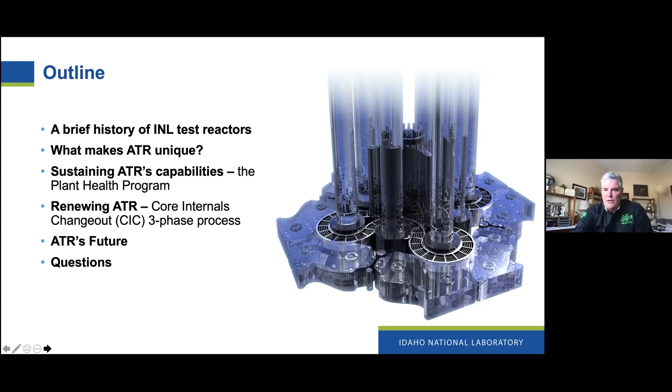So with that, the history of INL test reactors. When you go in and look, there's a footnote on here from an IAEA website, but 103 high power reactors, greater than a megawatt thermal, have operated worldwide, 6 under construction and 10 more planned.

I know that I had the opportunity to go down and look at a part of an IAEA conference when I was down in Buenos Aires just over a year ago, and look at the Argentinian reactor they're building down there. It's pretty cool when you see how folks are going about doing those types of projects.

37 of them operational in the US, and the most powerful of these operate at the DOE labs. So I've had the benefit of working at the High Flux Isotope Reactor. I've done nominally 2 tours there at HFIR, and now here at the Idaho National Laboratory in the Advanced Test Reactor.

Preceding the ATR was the Materials Test Reactor. So that started as 20 megawatt thermal, went to 40, and then that operated from 52 to 1970, which is pretty cool for that reactor. And then ETR, 175 megawatt thermal, that operated at the test reactor area, and I'll show you that here on this next slide. But that went critical in 57, operated till 81.

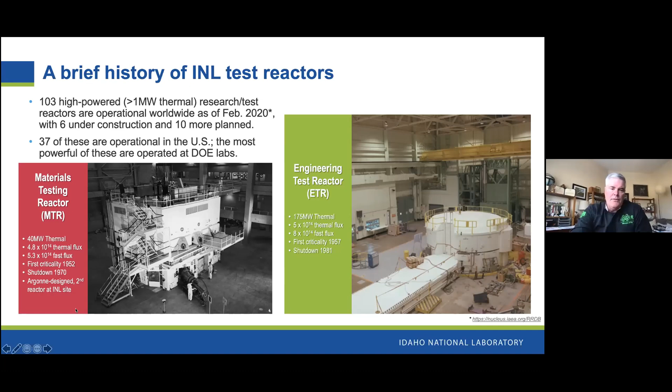There's folks that I work with today out here whose fathers actually worked at the site and took ATR critical when it started up, and actually had experience with the other 2 reactors. So we do have that in our history, with folks that have come out to the site and can talk about that. We do have people today that experienced that, so it's kind of neat.

All right, so in terms of ATR, it was created in response to fill something that the Atomic Energy Commission, the AEC, and the Navy looked at in terms of what they wanted to do, working for nuclear power plants for surface and submarine ships. At the same time, the High Flux Isotope Reactor was actually what they started with in the AEC response, and the Navy said, well, wait a minute, we need one for our work, and that is what created the Advanced Test Reactor mission need.

And so ATR actually works with the research capabilities and what they do for national security. We do work with NASA for space exploration with plutonium-238 production for the RTGs, and then university research and industrial innovation, so support the user community there, and then medical isotope work. So we do cobalt-60 and produce the medical isotopes there.

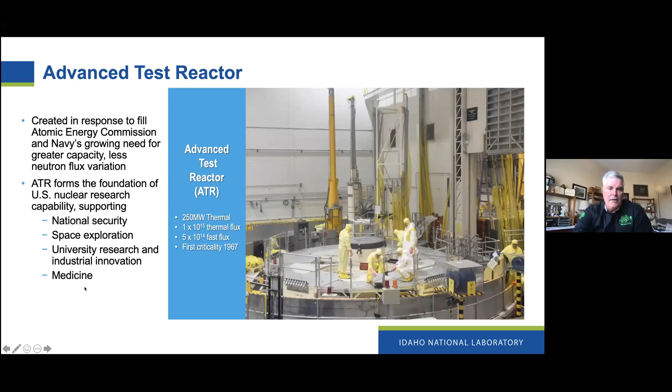So 250 megawatt thermal capability, 1 times 10 to the 15th neutrons per square centimeter thermal flux, and it went critical in 67. So I'm not going to tell you how old I was then, but I was around. That said, in comparison, the High Flux Isotope Reactor runs at 2.5 times 10 to the 15th, but it only has 1 flux trap, not 9. So we'll go through that here as we progress.

Okay, as I said before, ATR customers. So basically the big gorilla for us is the US Navy and the NNPP, or the Naval Nuclear Propulsion Program, needs for their testing of materials and fuels. So that's the big piece that we work with. Obviously, the Office of Nuclear Energy and the Department of Energy's Office of Science have a play there as well. NE is our sponsor organization, so we appreciate them with their collaboration with Naval Reactors.

NASA, as I mentioned, so they rely upon both the High Flux Isotope Reactor in Oak Ridge and the Advanced Test Reactor here at Idaho for their plutonium-238 production for their thermal generators. And then the medical and industrial needs and other special isotopes that can be produced with the irradiation capabilities we have. The university programs through the Nuclear Science User Facility, or NSUF.

If you haven't looked at that, NSUF's got their website. You can find the other details about the other nuclear capabilities that are out there, HFIR and other reactor activities and hot cells that are available to use in the NSUF program.

And then the industry, right now working with the National Reactor Innovation Center. So the Idaho National Laboratory has been designated as NRIC, and working then also with the Gateway for Accelerated Innovation in Nuclear, GAIN, and initiatives that come out of there, and being able to utilize existing facilities or expanded capability in the future that we look forward to coming to the Idaho National Laboratory.

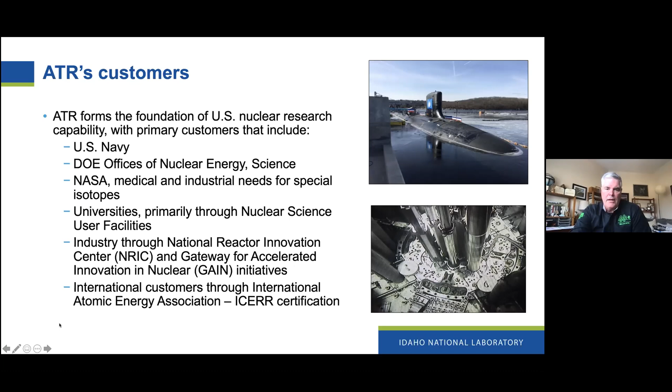Okay. All right, what makes ATR unique? As you can see, just the serpentine outline of the fuel, the 40 elements, and then the 9 void spaces that are there in terms of being able to put in-pile tubes or experiments in there. The rotating drums that we talk about that are there for the control, and so those outer shims. And then the irradiation locations, the I positions that are in the outer areas.

And then the unique shape of the beryllium that's in here in terms of its moderator. So the whole cloverleaf design, the 9 flux traps, and then the other outer area irradiation capabilities that are there are really unique in terms of that configuration. My experience at HFIR's got 1. So HFIR would have just 1 central flux trap that's there, also surrounded by beryllium. And that's 1 gigantic big donut that's a lot different than having 8 sections like this.

So very unique design, very unique in terms of its operation, and that the 4-foot high core region. So when you look at that and look across that entire stack that's there, if you looked at it in side view, you end up with this nice even flux profile that's there. And that's, again, kind of unique for that.

Independent power control. So there's actually what they call tilt. So we're actually able to control the power, let's say in the south, 20 megawatts, and be able to run 60 megawatts in the north. So you actually have a 3-to-1 power tilt across the axis of the core. Also unique. There aren't too many places you can go do that intentionally.

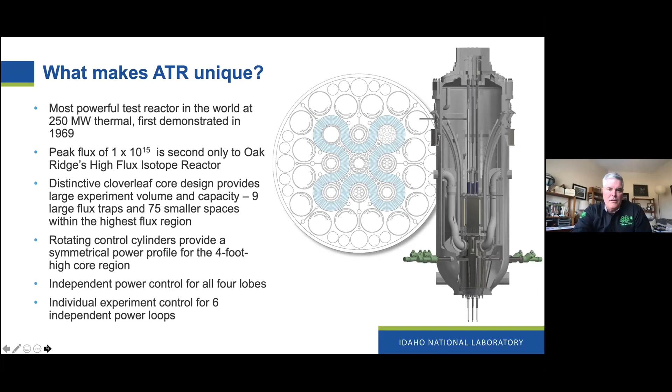And then individual experiment controls for the different experiment power loops. So we have 6 operating in-pile tubes today. Potential capability to go back up to 9, but that would take some pretty extensive work to get us back up to that, just because of margins and other activities that are going on.

Okay. All right. So how do we typically operate? In terms of just going through a cycle, it lasts about 6 to 8 weeks. So about 60 days of a normal irradiation cycle. Reactor refueling and experiment changeouts typically take about a month, 3 to 4 weeks. When we do that, what's also unique is that you've got the 40 elements that are used in the serpentine array of the fuel, and we can use an element up to 3 to 4 times, depending on how we want to tailor the fuel and flux density.

And so when you're doing a run, it's kind of different to think that you're not one and done with a fuel element, and that we actually store those out in the canal and then bring them back into use. And for each core, it is a different core safety analysis. So one could argue that every time we bring the reactor up, we've got a new core design. And it's really unique in terms of being able to do that and reuse the fuel.

For the Naval Nuclear Propulsion Program, every third cycle we run what is called a Powered Axial Locator Mechanism run, or a PALM cycle. This allows the 2 experiments that are left in the reactor. We basically take all the other experiments out and move them into storage, and then run real high cycle time. So over the course of 7 to 10 days, you could literally run an experiment in and out of the profile through the core in the high flux region 1,000 times in that time period. So again, unique, but those are for Naval Nuclear Propulsion Program requirements. So PALM cycles, again, rather unique capability there.

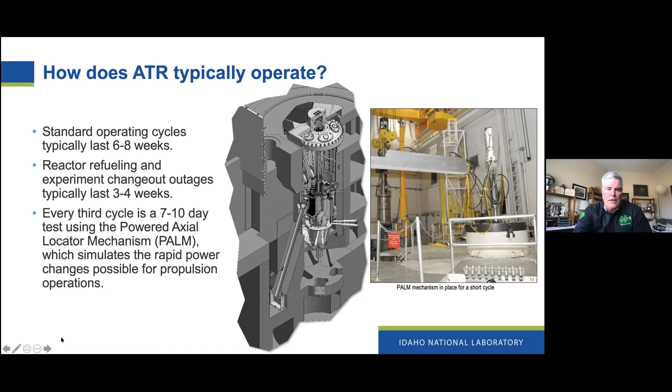And then we'll run multiple cycles, obviously, throughout a fiscal or calendar year, and we track that in our ISOP, which is the operating plan, and project out about a 3-year window of what we're going to do for experiments and how we run. Okay.

All right, so in terms of sustaining the capabilities, if you go back, I came to the laboratory in 2018. Preceding that, back in the 2012 to 2014 timeframe, the plant health program was initiated, and it was identifying that irradiation days, the ability to run the facility and give the highest number of irradiation days in a year, was starting to degrade.

So if the desire was to run 180 days, we'd be able to run about 140 because things weren't operating at the reliability and predictability that we were hoping for. So what happened at that time is they started the plant health program and the investments. And what we've developed now, as you see in the background, is this investment strategy document we update every year, and it basically goes through the prioritized projects.

So are we going to replace a motor? Are we going to replace a well? Or are we going to do something with a valve assembly or a different pump? What we do in terms of those projects and their prioritization to reduce the risk to not meeting our irradiation days. And so the execution of that is a DOE Office of Nuclear Energy, NE, and NR investment in the overall program. NE provides us funds that we go and put into that.

We've, since 2016, been able to do over 100 million, and right now it's about $130 million of total scope. And we'll go through a couple of highlights that we've worked on, including the CIC preps and things that we're going to talk about as well. So rather significant investment. It's kind of fun to watch folks that have been out here for many years reflect that it's nice to see this investment because it ensures that we are going to have the capability for much longer into the future, and that we're taking care of some things that folks have been concerned about in terms of just maintaining the facility and being able to run at the highest availability and predictability we can.

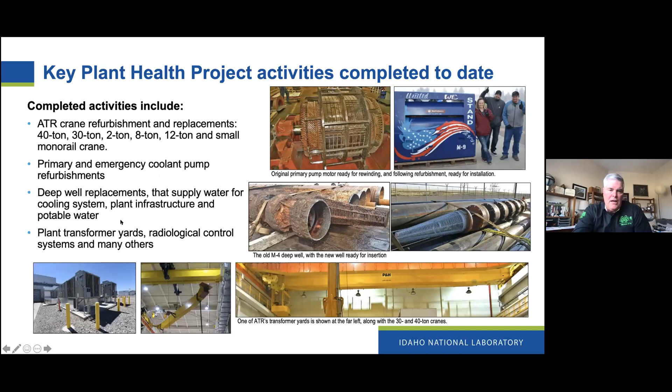All right, that transitions then from what I'd call sort of routine maintenance, to once maybe in a career, but for some, there's a second or third opportunity to go through a core internal changeout. I've asked and not had anybody identify they were here 4 CICs ago, but a core internal changeout.

So on average, when you see this timeline, ATR went critical back in '67, and they did the first CIC in '72, another one in '77, made it to '86, and then '94 and 2004. And here we are in 2021, next month, a month from today, starting up this next core internal changeout. I'll talk about here a little bit of why they're needed. But we've gone 17 years since the last one.

So we're knocking some dust off and have done a lot of preparedness in terms of operations and tooling and procedure reviews and getting prepared for this. But we had done 5 CICs up till now. And it takes place in 3 phases, and I'll go through the discrete phases here in a minute. But why are these needed?

Once the reactor's scrammed, and I'll go through the details, we defuel it, take the experiments out, and we'll actually remove the top head. And then the top head of the reactor will come off, and then we systematically go in and take some of the infrastructure of the core internals out of there and replace them with new.

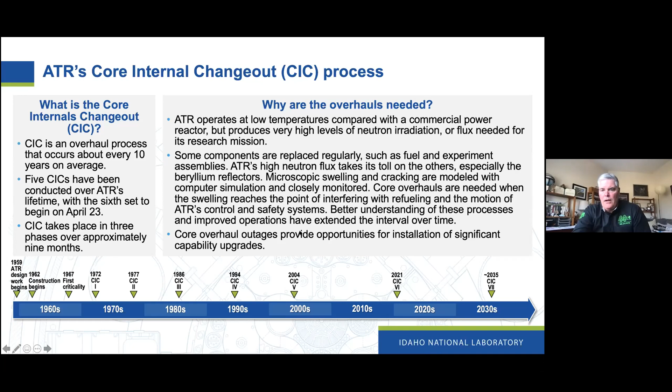And so in 2021, like I said, next month, we'll initiate a 9-month outage that will go in and replace things like the beryllium, like some of the control surfaces in there. And then it also looks at potential for upgrades. We'll work through some of the other plant health projects during this time as well.

Okay, so 3 phases, basically breaks down to removing the top head of the reactor and getting ready for working through the internals. So this is removal, taking out the gearbox and the outer shim control cylinders, the beryllium blocks, and getting everything out so you get what they call a clean vessel. And then look at the new components going in, and then shift once all of that's restacked and aligned.

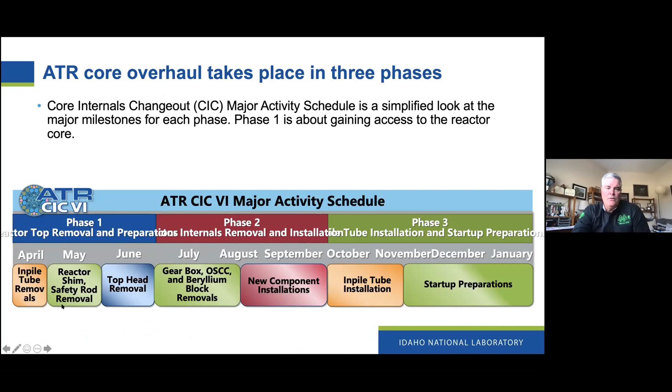Then we go back and start to work on putting the top head back on and doing the in-pile tubes, and then go to nuclear testing and startup. So that's real high level, and I'll go into the details here on the next one.

Okay, so in terms of phase one, that's where we actually remove the top head. So you can see over here, and we've got some pictures in there. Rather significant lift, and that was a good reason why the 40-ton crane was back in there, because it's about 36 tons, I think, if I'm recalling correctly.

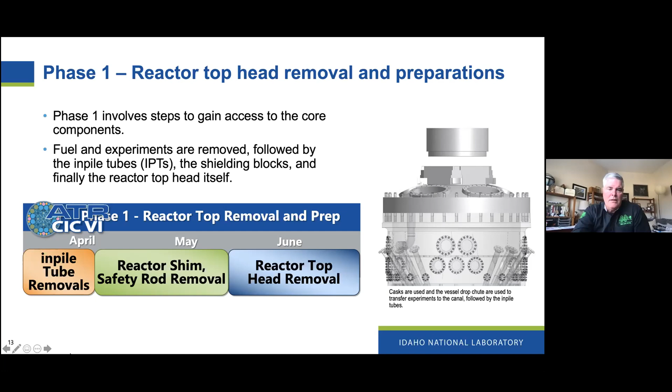And then we remove all the fuel and experiments and make sure that the in-pile tubes come out, the shield blocks, and get everything set up. And so when the top head comes off, it goes on a stand and sits on the reactor floor. And so you can see them going through, and this is a cask assembly on top, removing experiments and getting things set up. So this whole area will start to come apart. Shield blocks will come off.

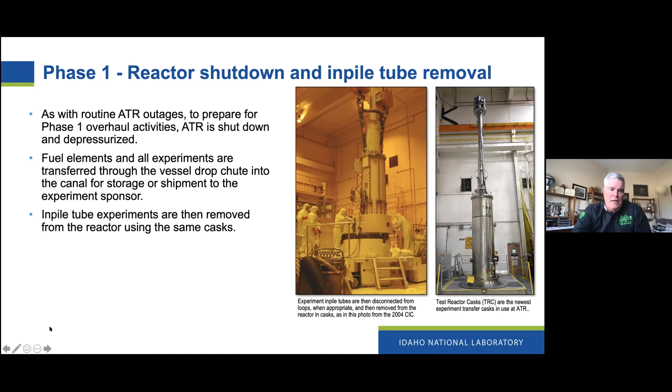But we are shut down, depressurized, defueled, and then start moving things into the canal via this drop chute. So that's actually the tube. I can go back up, but it's how we transfer things without going in air from the reactor itself into the canal area. And then again, a lot of cask evolutions in terms of moving experiments around and getting that done.

So then you're looking down at the top head itself, and these are shield blocks. So you've got 23 of these that move around and shield, and you can see the metallic surface under here. So this is the reactor top head itself and some of the ports and the port covers on them. And so as we move these blocks out, they'll be staged, and we're actually taking them outside of the facility, about half of them. So figure, what's half of an odd number, but about 12 of those will be taken over to another facility, actually sandblasted and repainted, and they'll be reinstalled when we go back into phase 3.

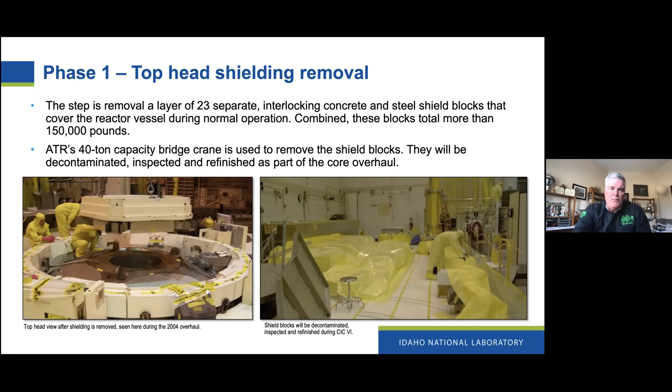But when you look at this, the shield blocks come off, and then we access the vessel head itself. And then you can see this, that's a rather significant lift, and you've got folks coming in, they're actually going to skirt the bottom of the vessel head itself. So 62,000 pound stainless lid. We lift that, put it on a stand, and we're actually going to do some work.

So if you look down in this area, this is actually fuel grid support that's going to come off, but the underside of that's got what we call the top head closure plate. And we're actually going to replace that with a new top head closure plate that will have 8 additional holes in it that'll allow for other experiment capabilities to be used in the future. And that's tied to some other things with the Halden reactor shutting down and being able to take advantage of the ATR flux for doing future work in there.

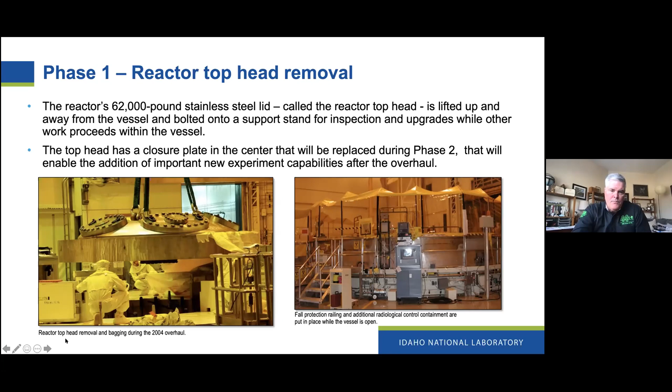Okay. All right, then we move into phase 2. So phase 2 goes in, like we said, removal of components within the reactor vessel itself. You can see this picture of operators looking over a port area down into the vessel and being able to get access to in-pile tubes and the cross arms that are there and get into taking other pieces of the reactor components out. So this platform's installed, and then they begin to further disassemble the core internals.

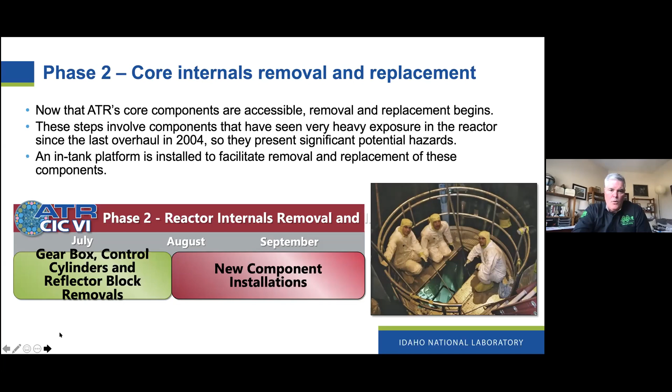And moving through, we've got, as was highlighted here in purple, the control cylinders themselves. So being able to remove that, and then the gearboxes that turn these, they're up on top of that assembly. Those gearboxes, this is a picture of one, actually are the drives that turn those cylinders. They will go into these things affectionately called banana cans. And so these are shaped, they've got a little arch or bend to them. And those will actually be transferred out of the reactor vessel and into the canal through the drop chute.

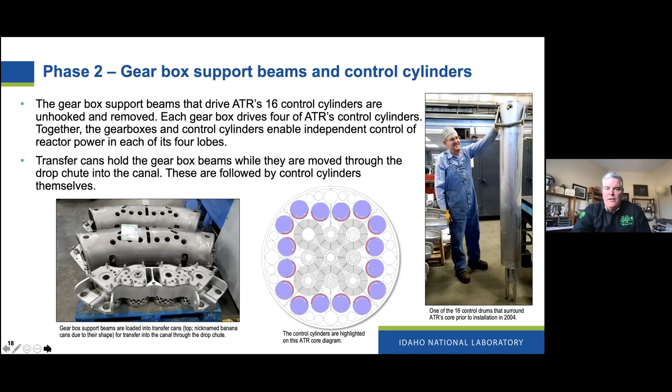So that's going to be a tricky one because you're playing between 2 crane assemblies, one in the reactor high bay area and the other in the canal, and actually have to transfer that and move it from one area around the other without getting it stuck. So we've actually done some preliminary work on that and made sure that folks are proficient in getting that through. We took an empty banana can and played with it there, because having not done that for 17 years, it takes a little while.

Okay, and then we do in-air transfers. So some of the equipment we can't fit through the drop chute, so we actually have to do it as in-air transfers. These are highly irradiated core components. And so when we actually do this, we evacuate the facility. There's a limited number of staff that are there to operate the crane. You can see some of these shielded areas that are there and the windows that we're able to shield. And then there's a contingent of folks that are outside the facility with a backup mounted winch to be able to move things if, heaven forbid, we were to lose power during that evolution or ran into a problem.

But they do not fit through the top or the drop chute, and so we actually lift them out and then transfer them in air to the canal via the crane. And then the crane operators that are there, we actually evacuate the site and do that. And we're able to do that the way it's scheduled right now, basically a Friday through a Sunday, which means there's limited staff around anyway, because our normal work week's a Monday through Thursday, a 4-10 schedule.

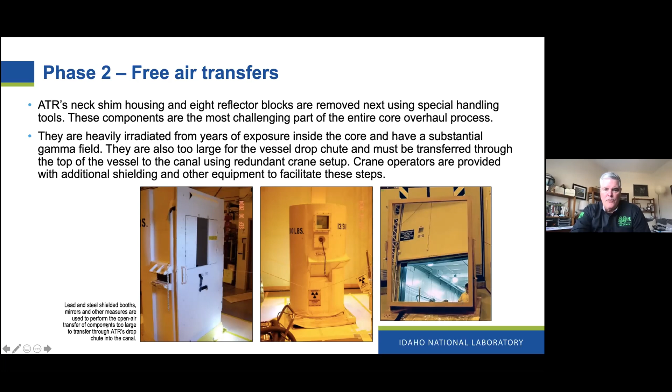So you see here the shielded booths, and being able to work from those spaces, they actually can observe and keep the operators safe from the higher doses. Okay. So then the next thing we do is the reflector blocks and neck shim housing. So the neck shim is actually this tall aluminum component that's there in the central portion, and then the beryllium blocks. And so you can see the unique shape of these.

The other thing we note in here is these are actually side cuts in the beryllium, and these are to allow for crack propagation to be limited. So you run into a controlled cut here, that the crack, if it were to start down in this section, wouldn't move beyond another area. And this is the nose piece that would be in near the in-pile tube itself. And so those are important to make sure that we end up with no cracks, or don't want a piece of that breaking off.

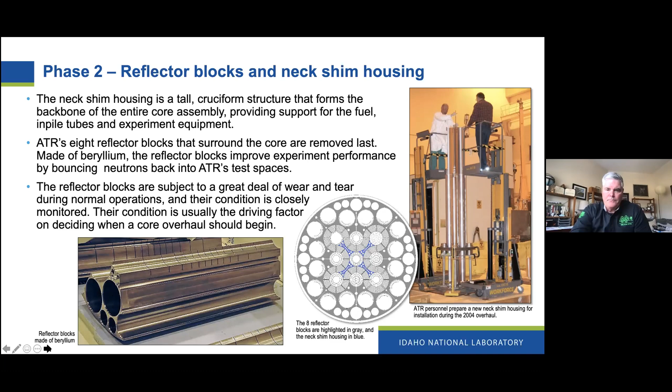Okay, so this again is the biggest piece of making sure we start the CIC early, is that we don't want a control cylinder binding in these holes, or we don't want a piece of beryllium swelling or cracking such that we're unable to operate. Okay. All right, then we get into new component installation. So now everything's out of the reactor, we start building it back up. We're gonna do some vessel inspections. So this is just visual going in.

We've already done some ultrasonic and played with some new scanners and had a really good look at weld areas and questions about the integrity of the vessel. And it's pristine. It's the beauty of a stainless steel construction. But going in and doing these visual inspections, we start building things back in. So the new neck shim housing, reflector, beryllium blocks go in, control cylinders, and start working things backwards from what we took apart.

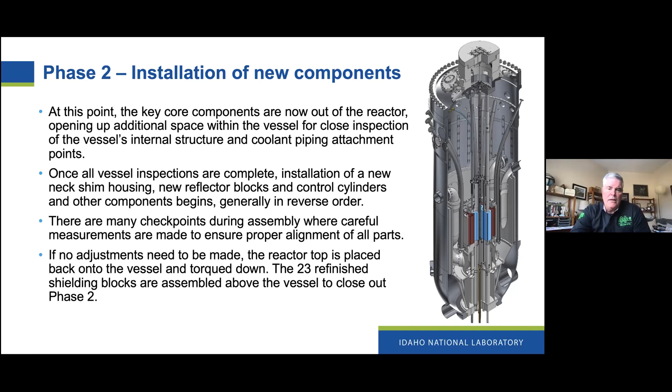All this is done through a lot of procedures and control points. And then making sure everything aligns. So this is making sure things don't bind and get everything back to torque specs and to where the core itself is reconstructed. And then the shield blocks, the vessel head would be ready and reinstalled, and get back to the end of that phase. And then we go back in phase 3 and get back inside the tank itself and start reinstalling the in-pile tubes. So then those and the experiments get loaded back in.

We've got some welding to do for some of the cross arm pieces that tie into the side of the reactor vessel itself. And then once those installations are done, and I'm minimizing the amount of work, that's a huge effort. We have folks back in the tank again. You'll see some pictures here. We're using some new technology for us, but it's been out there in commercial forever, and doing the welds this time with new tooling. But everything's sealed up, tested, pressure tested, and then we're able to start up and get back into preps for getting the reactor back and doing nuclear testing.

So when you look at this, we just actually got a new tube welder, right? So this orbital welder assembly, this is one of our welders actually looking and controlling the weld head. It's kind of cool. And I was out there when they were doing it, and the rep for these guys told us that this controller itself is set up off a Formula 1 race car steering wheel. That's what they used as a prototype to kind of lay that out. So I'm thinking, okay, that's pretty cool.

But it'll allow us, instead of doing hand welds, to get this set up, and the orbital welder can knock these welds out without somebody standing right up on it, which allows us to be more ALARA, right? And less radiation exposure. Okay, and then you can see here on this picture, folks being able to lower the in-pile tube assemblies back in and get the experiments set up. And then when you're down in the bottom, the bowels of the reactor and the sub-pile room, you can see where things protrude down the bottom.

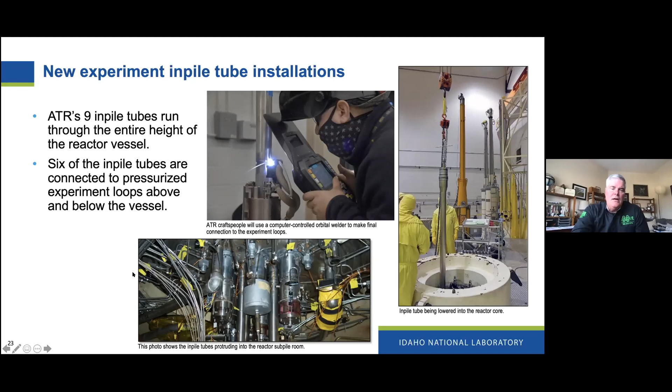And this is something we have to go in and clean up in there as well. So we'll have the bottom of the in-pile tubes in the sub-pile room that we work through, making sure all these seals are tight and that we don't have any leaks. Okay. All right, so with that, I'm getting down to the end.

We'll have completed that. It'll be a 9-month evolution going basically from April all the way through December. We're trying to finish up before Christmas holiday. And then we go into a phase of nuclear testing and making sure we understand the rebuild on the core profile, and it's exactly as we anticipated.

We have customer demand for the irradiation capability. It's been identified well through 2040. If you read NNSA's strategic plan, they talk about thermal irradiation capability need at ATR all the way out through the year 2080. And I don't think I'll be operating or working out there that long, but I know we've got staff that have started that could potentially be out there for another 60 years. It'd be kind of fun.

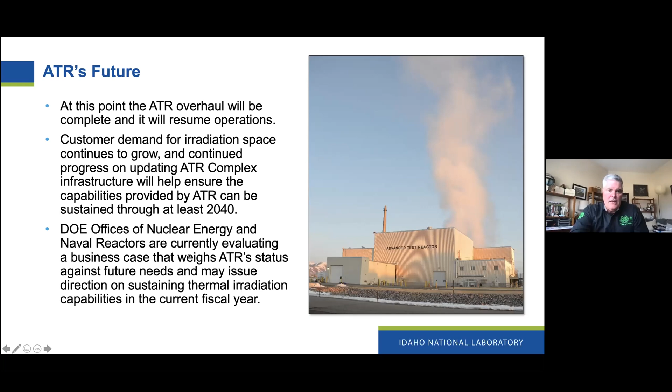Okay, and then NE and NR are looking at this business case I mentioned in the front about how we keep going with the reactor itself or the capability out there, and how we would meet current and future projected needs for irradiation capabilities. And we're hoping that we get some direction to move down the path of either a recapitalization of the existing reactor or a potential replacement reactor, and get some direction from the federal government on the path they want us to go in the next year or so. So we're anticipating that.

And it looks like Elijah Cook said to everybody that he loved the new primary pump. Yeah, the paint shop took a lot of pride in putting that together, and we were able to get that done.

And then the question about how long does it take to depressurize? So basically about the first week as we enter into the scram of the reactor is where we start to do the depressurization, let the temperatures come down and settle, defuel the reactor and get things set up so we can start the next sets of evolutions. So within a few days, we're down, depressurized, and defueled.

And then Marty has got a question about in-pile tubes going back into the reactor, same ones. We actually are replacing all but one of the in-pile tubes, so we've got 5 new ones going back in. And I guess the question, fluence limits. So we did have a failure. The 2 Delta in-pile tube actually had a failure not too long ago, and that one has not reached anywhere near its time in the reactor. And so we'll reuse that, but everything else is getting replaced with new.